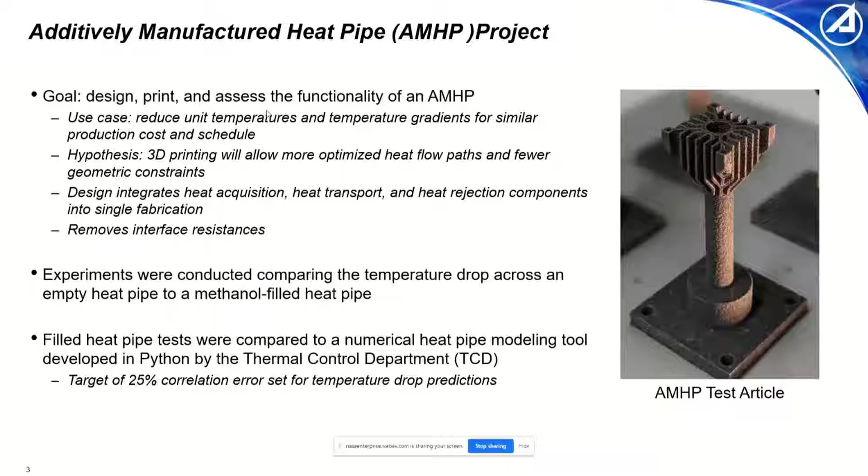And this is going to incur increased costs, increased likelihood of print failure, and when we're printing using metal, especially on very small resolution parts like the wick for a heat pipe, it's very difficult to remove the support material from the inside of the heat pipe.

Additionally, the print orientation is very important. So a traditionally axially grooved heat pipe can only be printed in a vertical direction due to those overhangs, but this comes with path and size constraints. Vertical prints will allow only very minor curves in the heat pipe path to be printed. Due to this, a circular cross-section with axial grooves around the entire circumference is of interest for vertical prints.

Horizontal printing would give more freedom in terms of the size and the heat pipe path, but the grooves cannot be printed around the entire inner diameter of the heat pipe due to avoiding overhangs. So limitations there are that horizontal prints will allow only certain heat pipe cross sections to be printed.

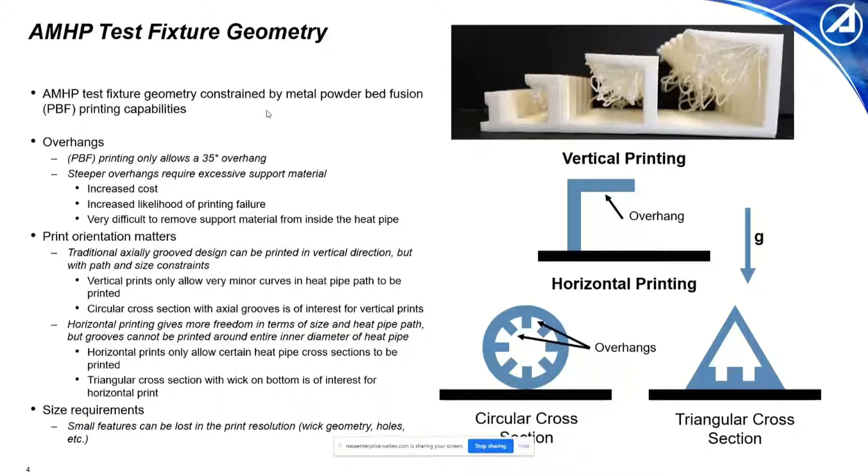Moving into the test article design, the initial objectives of our design were to demonstrate failure-free printing of heat pipe geometry. With that geometry, we want to obviously demonstrate heat pipe functionality, and in doing so, we want to explore a simple sealing approach. Creating a hermetic seal is one of the biggest issues that we face, and without a hermetic seal, you cannot have successful heat pipe operation. So our goal was to create a simple approach that would allow for reproducibility of results and long time usage of our hermetic seal.

We elected to use a vertical configuration in order to reduce the risk of any print failure. In doing so, we're allowed to print grooves around the entire circumference, so there was no wick overhang.

A SolidWorks simulation was run to confirm adequate heat rejection capability of a fan and a finned heat sink. In doing so, we then were able to run the test in air using a simple fan cooler rather than needing to run with a chilled water loop, which again aided in the simplicity of our design.

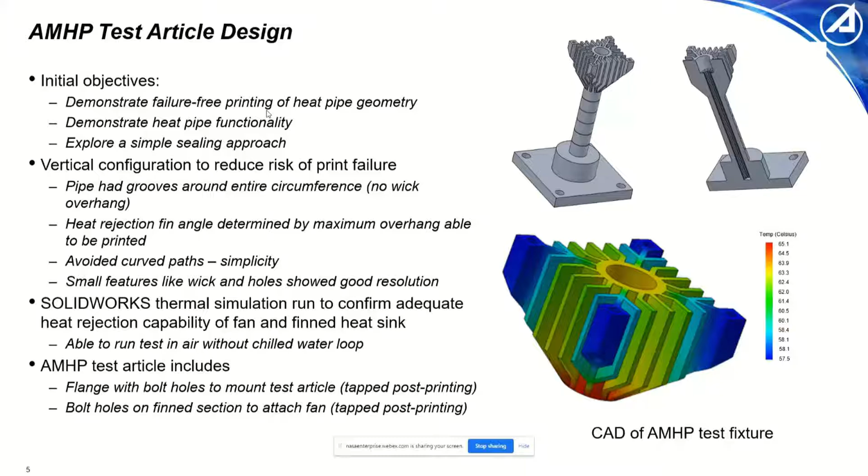We also performed a simulation and a residual stress assessment in order to determine the success of printing. One primary concern, especially when using a vertical configuration, is we want to make sure that there's no recoater blade crash between the blade itself and the test article while it's being printed. So the analysis predicted that there would be no crash, and this was validated when we actually printed it.

Additionally, there was a maximum residual stress of 307 megapascals predicted. For this material, this results in yielding but no breakage. So the process simulations predicted successful print, and the residual stress was within material allowable limits. So we went ahead with the printing.

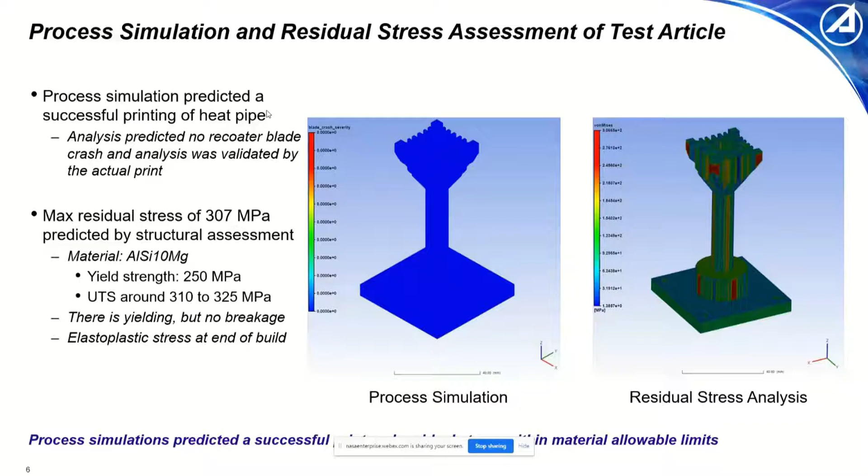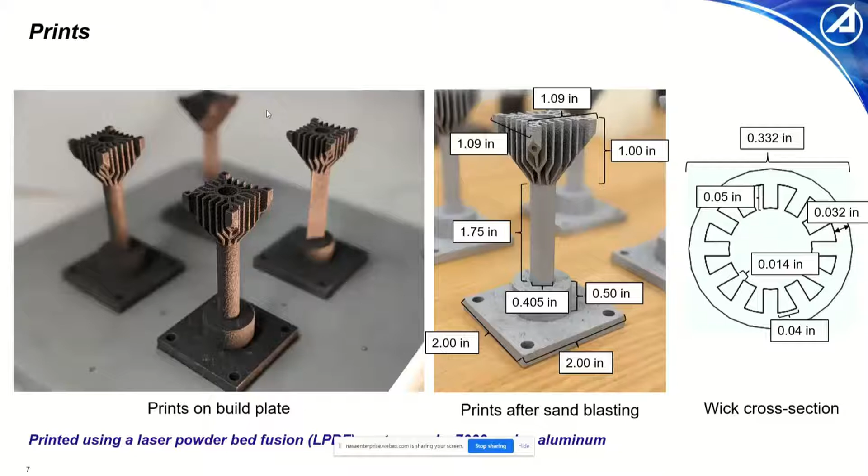We didn't require any post-process machining whatsoever. The only post-process that we did was sandblasting. So no post-process machining was required, and no isostatic compression or any heat treatment of that sort was required either. So again, that aids in the simplicity and reduces the cost and reduces the time in the manufacturing for incorporating these into a space vehicle.

We used a Kapton heater to apply heat into the base of the flange using a constant voltage and a measured current to specify different power values. There were 8 thermocouples applied along the length of the pipe. A quick note on that was that the TC8 there at the bottom was applied after the filled data was obtained. The filled data that we're going to present is only going to include the first 7 thermocouples.

Using these thermocouples, we measured the temperature drop across our heat pipe. That's our primary metric of comparison, the temperature gradient. And we did that by subtracting the temperature readings between TC4 and 5, which read the same value, and TC6 and 7, which read the same value. So that corresponds to our evaporator section and our condenser section, respectively. A fan was placed on the condenser section in order to provide heat rejection and reduce the overall test temperature, since we were testing just in air.

And a Swagelok fitting was used to seal the pipe once it's filled. We actually threaded the fitting into the pipe after tapping that hole at the top. And then we used Torr Seal to seal the fitting into the pipe as well. The reasoning for this was that we initially started using a simple NPT plug with some Teflon tape, but unfortunately that failed to seal. We were getting leakage out of the top of the pipe, so we opted for a more permanent approach by sealing one end of the Swagelok permanently into the pipe. Due to the size of the Swagelok compared to the NPT fitting, we had to incorporate some standoffs there to offset the fan.

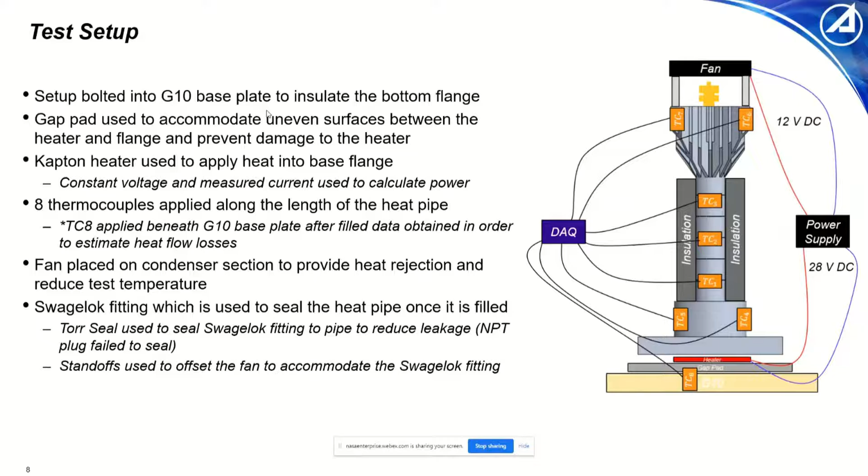And then in order to create a hermetic seal, we use a fill, purge, boil off method. So what we did was we powered the heater on to 10 watts. We began boiling the fluid, and the goal of this was to purge non-condensable air from within the heat pipe. So as we're boiling and the balance reading approaches our desired charge mass, we close the pipe using the Swagelok fitting and attach the fan to the top of the condenser section, and then simply allow the thermocouples to reach steady state. So in most of these tests, steady state was reached after approximately an hour.

After that, we would record the temperature drop, the delta T, from the evaporator, which was thermocouples 4 and 5, to the condenser, thermocouples 6 and 7. And then we would increment or decrement the heater power and repeat. All of our test results were measured at 3 input power levels, which were 5, 10, and 15 watts.

And I say increment or decrement because heating versus cooling, in terms of our boiling behavior in the evaporator section, we noticed became very, very important. I'll discuss that later, but in some cases we started at 10 watts and then we would go down to 5. In others we were at 10 and we went up to 15. But in every case we somehow captured 5, 10, and 15 watts on at least heating, if not cooling as well.

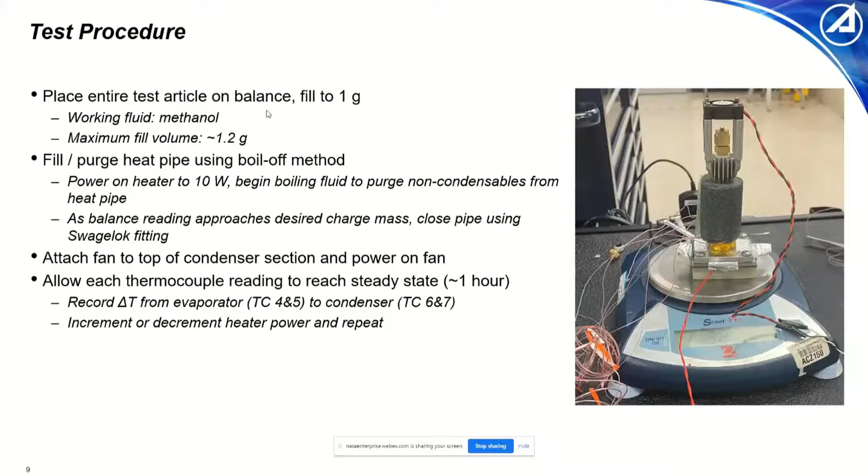A quick overview of our test results. You can see the very top curve here is our dry heat pipe. So this data was obtained by powering on a heater at 5, 10, and 15 watts, and no working fluid was present in these tests. So this is to simulate a basic spacecraft structure, like a bus panel, without any embedded heat pipes. The 4 curves at the bottom, there are indeed 4. The green one and the dark purple one overlap, except for in that last 15 watt case, but the 4 curves at the bottom represent 4 filled data sets.

So these are run with different charge masses that you can see in the legend, consisting of between 0.39 and 0.54 grams. And what we did was at each power level, we took an average delta T. So at 5 watts between those 4 curves, we averaged the y-axis value, the delta T value. We do the same for 10 and 15 watts. And then if you take that value, we call that delta T filled at a given heat input value. And if you take the ratio between that and your delta T dry, which is that top curve, you get the numbers in this table here.

So you can see at all heat input values, we demonstrate significant improvement when we're using a filled heat pipe, but particularly at high heat inputs, 15 watts, we see almost a 90% drop in the delta T. So a significant average delta T reduction seen across all 4 runs. And this validated our heat pipe performance. So we can conclude that additive manufacturing is viable, and it does create a heat pipe which can be sealed and can operate in heat pipe orientation.

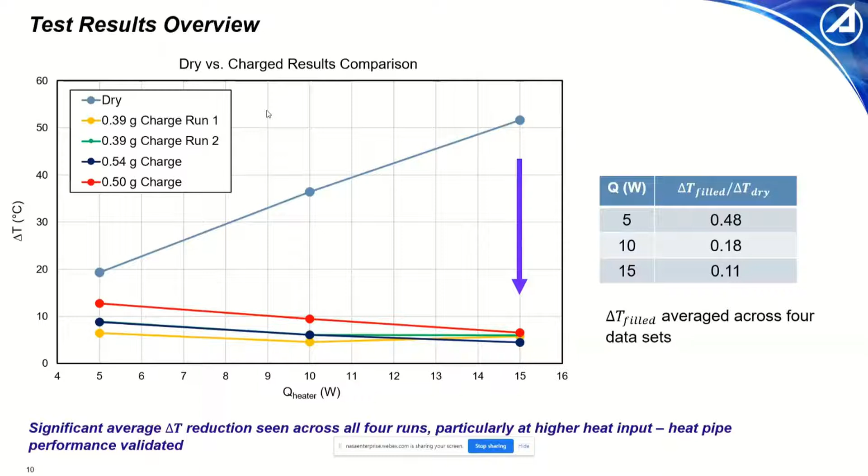Moving into an overview of our Python model. The Python model is an 8-node model, which takes into account resistances through the condenser, wick, and outer wall, which are simply conductive resistances, a 2-phase condensation resistance in the condenser, a vapor pressure drop resistance, a 2-phase resistance in the evaporator, and then conductive resistances through the evaporator wick and wall as well.

The primary model inputs are the heat pipe cross-sectional geometry, the working fluid properties as a function of temperature, the desired heat input value, the charge mass, and the outer wall temperature. So for primarily your 2-phase resistances, these values are temperature dependent. So in order to calculate a resistance, you need knowledge of the absolute temperature at that node as well. So because of that, we needed to enforce some temperature constraint along this node network.

It could be any value, but we opted to use the condenser outer wall temperature, which we've denoted to be TW, because typically this is a function of your heat rejection, and it's a pretty well-known temperature. A quick note is that these node numberings do not correspond particularly to the thermocouple values.

So you can see TC5 and TC6 are on this diagram as well. So the thermocouples and the node model do offset slightly. The basic formulation for the code is the model calculates a resistance between each node. So it starts at TW, it would calculate a conductive resistance between TW and T1, and then from knowledge of the heat input and the individually calculated resistance, we can calculate one delta T

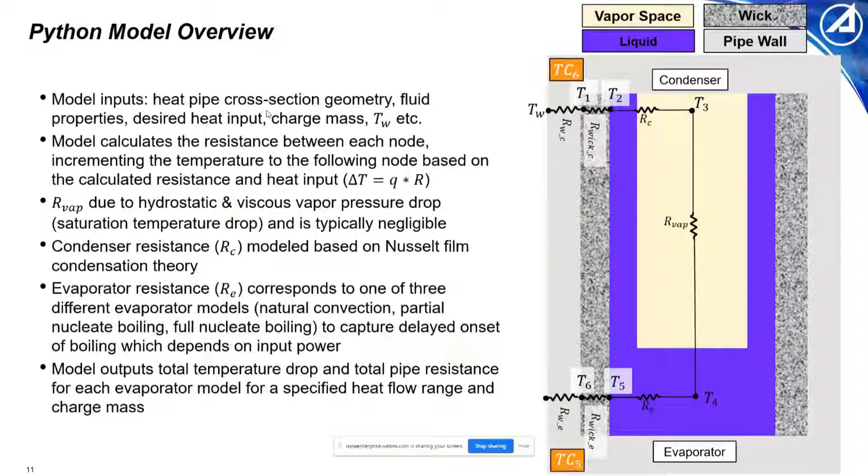Here are a couple pictures of our sample outputs. So as I said before, these correspond to 3 different solutions. So for every heat input value, in this case, the code was run for a sample geometry from 5 to 20 watts. At 5 watts, all the way through 20, there are 3 different temperature drop solutions. Again, those 3 solutions only differ in that the node network is changed slightly by changing the evaporator resistance from nucleate pool boiling to partial nucleate boiling to natural convection.

So you can see nucleate pool boiling is our most efficient form of heat transfer. So it results in the lowest total resistances and the lowest temperature drop. After that is partial nucleate boiling. The term partial nucleate boiling can really refer to a process that corresponds between these red and these green curves. There isn't typically a discrete model for partial nucleate boiling. For the purpose of comparison to experimental data, we selected the blue curve, which is based on the Rohsenow boiling correlation. But partial nucleate boiling behavior can really occur in that whole shaded region between the top and bottom curves.

And then our least efficient form of heat transfer is just pure natural convection occurring along the evaporator wall due to just the temperature gradient and the working fluid being in a pool. So that results in the highest resistance and also the highest temperature drop. One thing that is important to note is that our pipe resistance actually decreases with higher heat fluxes. And the reasoning for that is that the efficiency of boiling and natural convection increases as the heat flux increases as well.

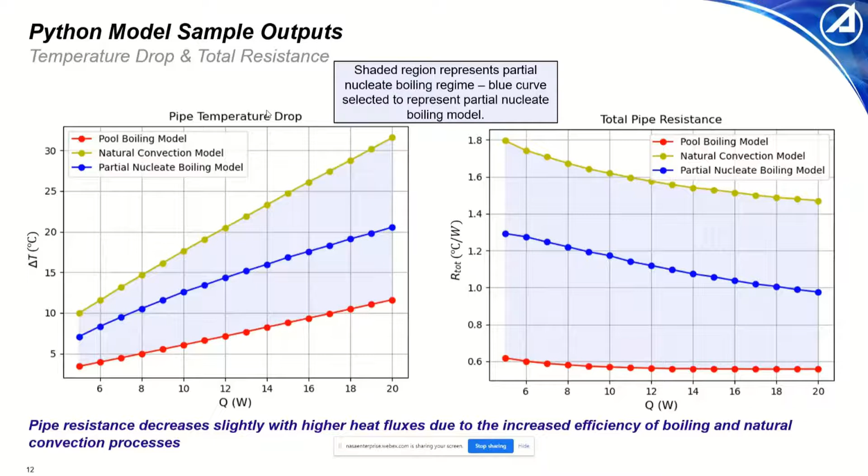An overview of the experimental results and the model comparison is shown here. Note that this does say heat input corrected, and what I mean by that is that we accounted for convective losses on any exposed sections of the heat pipe, as well as conductive losses through the G10 base plate. So for each of these tests, the heater specified value was 5, 10, and 15 watts, but you can see after accounting for heat flow losses, those values drop by a couple of watts depending on the case.

But across our 4 runs, you can see the 3 curves that are presented are the code model outputs, and then the measured values are the yellow triangles and the purple diamonds. So one important thing to note, and I'll touch on this a little bit later though, is the wide range in wettability, surface roughness uncertainty due to our 3D printing, any contaminants. They can create a really wide range of partial nucleate boiling and natural convection behavior. So because of that, at similar power levels, we get very different measured heat flow values.

So across these runs, the model curves remain more or less the same. They differ slightly due to different working test temperatures. Again, that TW constraint changes. But the experimental values, we do see a very wide range in the results there. How we concluded different results was we present all three of these evaporator models, and then we make an assessment about the heat transfer regime for each heat input.

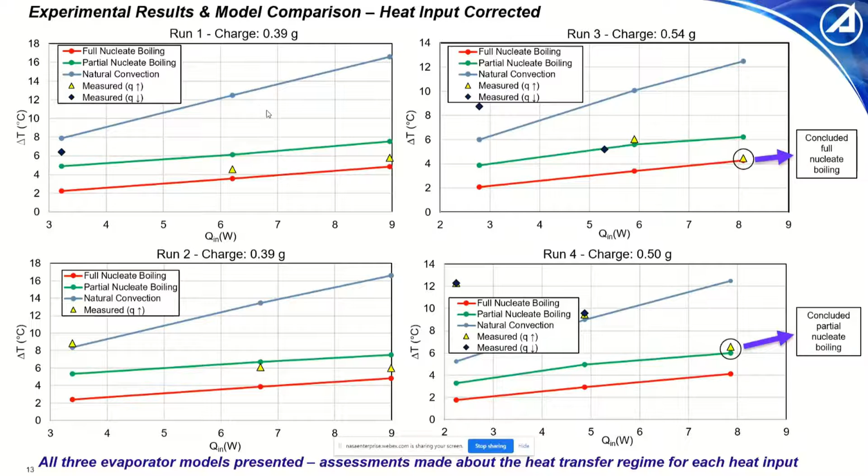A few notes on potential sources of deviation in our results. Contamination in the form of oxidation, corrosion, or any oils can affect our boiling characteristics and increase our surface thermal resistances. Failure to purge any non-condensable air can degrade our condensation performance, can also result in oxidation. And this is likely because our vacuum seal can be degraded due to repeated opening and closing. It took a lot of work to nail down our sealing procedure and a lot of opening and closing on the Swagelok. So damaging those threads is definitely a possibility.

Additionally, as I discussed, any heat flow losses on the exposed evaporator section and through the G10 base plate can reduce the total input and increase uncertainty in what the actual heat input into the pipe is when we're talking about a model comparison to the experimental results. Additionally, filling inaccuracies result in uncertainty of our working charge mass. So the fill, purge, boil off method is great for creating a simple hermetic seal, but using a balance to track evaporated mass losses in real time is by no means the most accurate method. So there are uncertainties in the working charge mass, and then in turn that creates uncertainty, particularly in the active area for your two-phase heat transfer processes.

And then finally, and probably least importantly, but still a source of uncertainty, is the thermal conductivity of printed aluminum. So we did not assess the conductivity itself, and that value, due to it being 3D printed, is typically going to be a lot lower than pure aluminum.

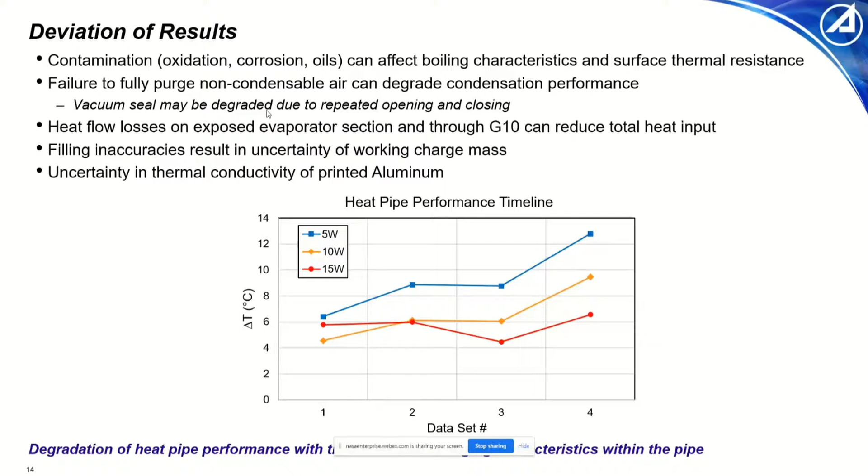Overall conclusions are that despite the performance degradation, additively manufactured heat pipes do demonstrate successful operation without significant post-process machining required. Additionally, the Python model matches the experimental results within the target of 25% for 12 of the 15 cases. The 25% target, again, corresponds to the assessed operating heat transfer mode based on both expected boiling behavior and trends in the experimental results.

The other 3 out of 15 cases in which the Python prediction falls outside of the target may be explained by experimental uncertainties in the temperature measurement, the working charge mass, and the contamination effects that I discussed previously. It's important to note as well that the model does show a better agreement for early runs. 2 out of those 3 cases were from the very final run that was performed. And as you can see from the timeline that I showed previously, the performance degradation was certainly apparent. And because of that, we do conclude that the Python model is accurate in predicting the overall heat pipe performance.

Some future work includes further quantifying our uncertainty analysis by performing more sensitivity studies, looking at error propagation through our measurement instruments, etc. We also want to refine the filling and sealing procedure to reduce that uncertainty in charge mass and also allow for long-term use. So in doing that, we would have a more accurate prediction of the active areas, the amount of pipe surface area that was covered by liquid, and then also we would not have any performance degradation from the loss of our hermetic seal.